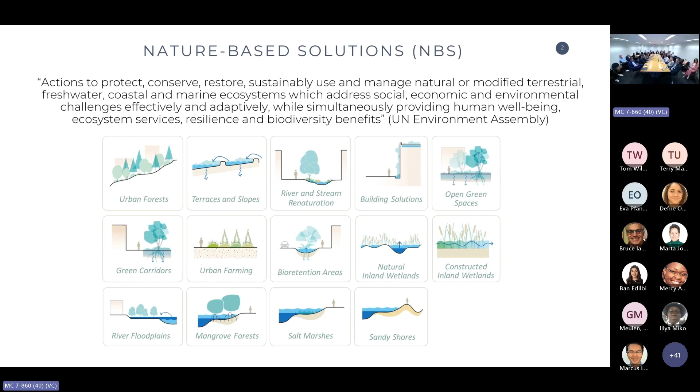And we did that through 3 pillars that we're working across. We develop knowledge, where we identify knowledge gaps on nature-based solutions. We provide operational support with the integration of NBS in actual World Bank projects, and we foster partnerships, working with partners like the International Working Group here today to stay updated on the latest developments around nature-based solutions.

Despite the growing demand for nature-based solutions, there are still several challenges that prevent NBS from being implemented. One challenge we come across often is around operations and maintenance of nature-based solutions. This is seen as a significant knowledge gap when we talk to World Bank teams or governments around the world. Even when client governments understand the potential of NBS and investment options, they can still hesitate to implement them when uncertain about their O&M.

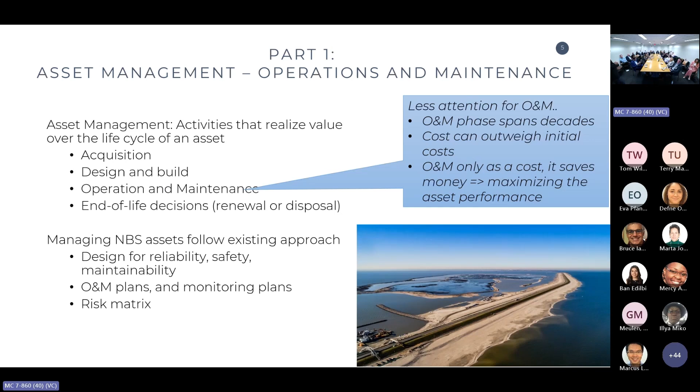What's the difference when you think about an NBS asset? In general, you can say that the behavior of the asset is unclear in the beginning. Maybe you don't know yet how it will develop.

So you need a strong monitoring program in the beginning, in the initial stage. I was part of many monitoring programs, and I thought it's also a very great opportunity for students. This is a picture from a while ago when we had a student at this Sand Nourishment, so it's a great opportunity to learn for students.

Another difference with NBS assets is that they have less sharply defined boundaries. It's nature, it can be bigger, it can be small. It's not only a levee, but maybe also the foreshore, so it can be much bigger.

And secondly, NBS assets can change over time because we deal with soft material, but also nature can change. It can grow, it can decay. So there are more changes we have to take into account when we think about asset management.

In general, you can say that NBS assets are maybe more complex and there are more stakeholders involved. And in these guidelines, we want to help how to deal with these differences.

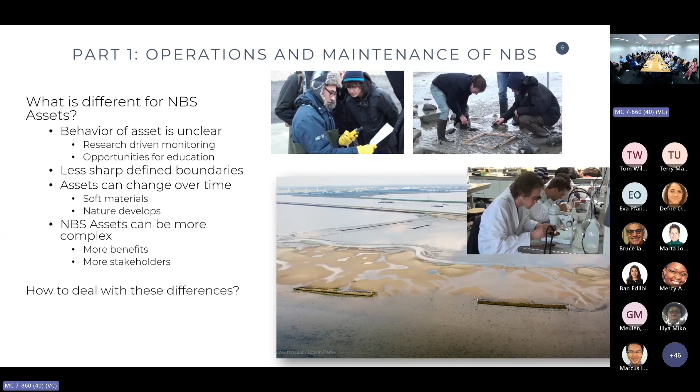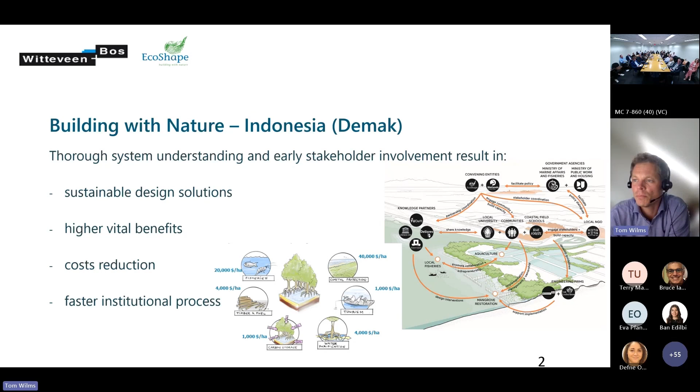A bit about the project. The vision we had at the start, and which we were able to achieve as far as possible, was a cyclic or iterative vision, because you need a prosperous local economy to enable the maintenance of the mangrove green belt. But you also need the mangrove green belt to provide coastal safety for the enabling economy to prosper. So it's not only protection or only production, they go hand in hand, and that is what we did in the project.

But I will focus mostly on the mangrove greenbelt and even on the temporary permeable structures. So where is the project? It is in Indonesia, on the island of Java, and the area shows the coastal area of interest.

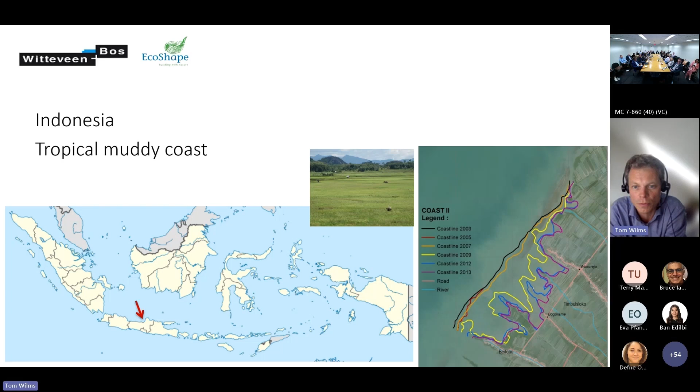It used to be paddy fields, rice fields, which were later converted to aquaculture ponds, and on the right image you see the coastal retreat. So in roughly 10 years, the coastline retreated at some locations up to 2 to 3 kilometers. So some villages were lost, and people needed to be relocated, as you see in the images here.

On the top, you see houses flooded and within the mud. So those people had to be removed.

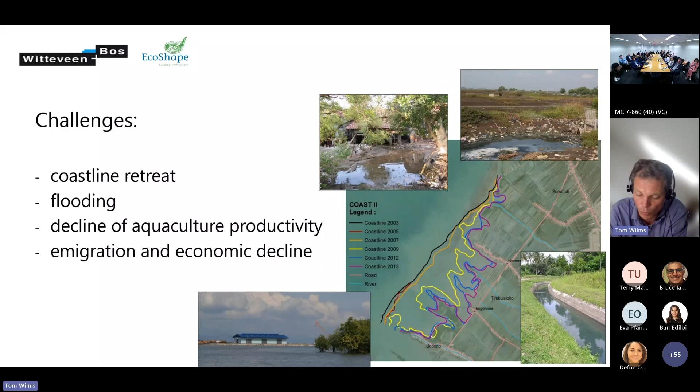We first did a thorough system understanding and continued with that over the entire project, but also looked for alternatives for coastal protection. We learned that both hard structures as well as mangrove planting often don't work in muddy systems or in coastal systems.

But we also looked at successful alternatives which were used in the Wadden Sea in the Netherlands: permeable structures that trap sediment, and over time the area heightens. That is what you see at the right. Also there, it was learning by doing.

We improve the structures every year. We build new structures every year, but every year we also learn from the structures we built. The structure at the right was built, I think, always before stormy season, and after 2 months, the sediment at the right side was even already above low water level or mean sea level.

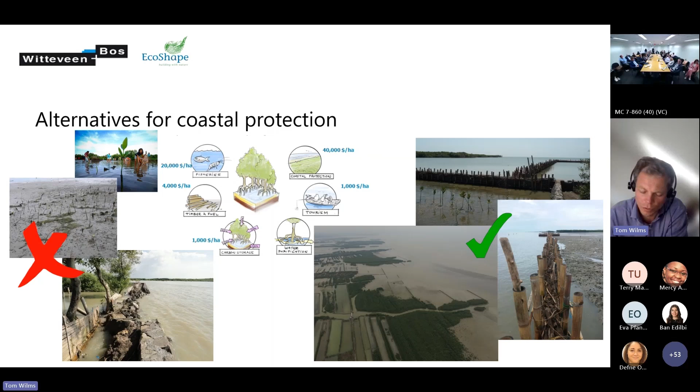In the middle image, you also see the permeable structures as well. Behind them, sedimentation takes place, and also mangrove patches come back. So the focus for the remaining minutes will be on the monitoring and maintenance of those permeable structures.

The monitoring was done on various spatial levels. We have, for example, a monitoring pole to monitor sedimentation rates before, behind and in front of the permeable structures. We also monitored the structures themselves, as well as the elements of the structures: the vertical poles, the horizontal beams, the fill material, and the wire used to keep it strong.

Everything we did was together with the field team and local people, deciding where to build new structures. We did tests on how to build it, involving new contractors since this was a new structure they hadn't built before. Both contractors and the team joined the training to see how it works.

These were also, for me, the very first poles that were placed into the mud. That was done all manually, by jumping on a horizontal beam, poles were pushed into the soil.

Local communities were involved from the very first start, not only for construction, but also inspection of the materials. So all the materials that arrived needed to be checked.

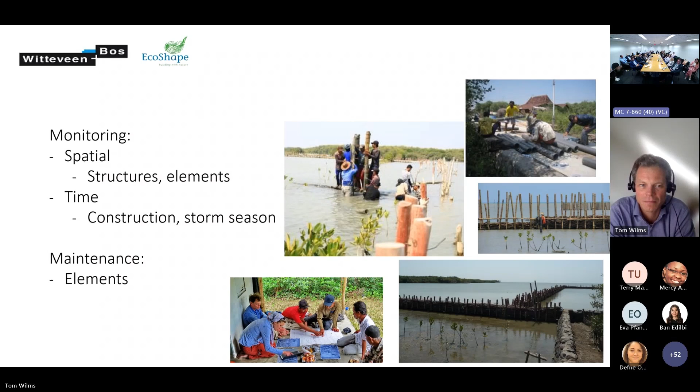Then I will speed up. Challenges were that there was shipworm, so the poles were eaten. So we moved to bamboo, but we also had other learnings, and we also moved to PVC poles in the end.

Financing part: this project was funded by the Dutch government and German government. We made some papers also about cost, showing construction cost and maintenance cost. Maintenance cost per year was roughly half of construction cost.

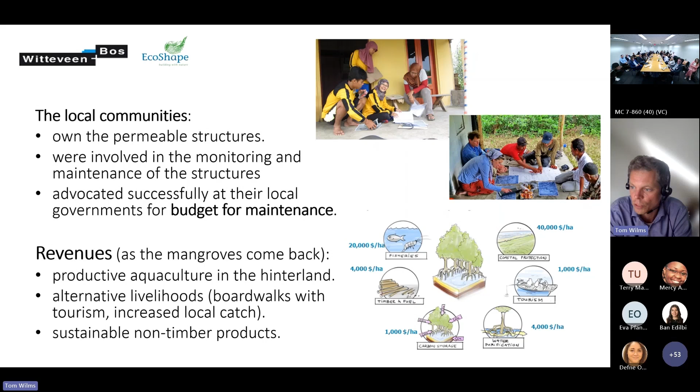As I said, the local community did a lot. They owned the structures, were involved in every phase, and they also advocated and lobbied for financing from local governments, which they received. Because the permeable structures bring back mangroves, there are a lot of revenues, which was part of the vision as well - aquaculture provides revenues, tourism, and also products from the forest.

All right, I'm going to assume I haven't heard anything bad, that you can all see this. Thank you so much, and welcome to the Hamilton Wetlands Restoration Project. The project's located about 30 minutes north of San Francisco in California, here in the United States. It's a two-part project: wetland creation at a former Army base and the beneficial reuse of dredged material. The project is composed of 3 different sites, and once completed, it'll restore about 2,000 acres.

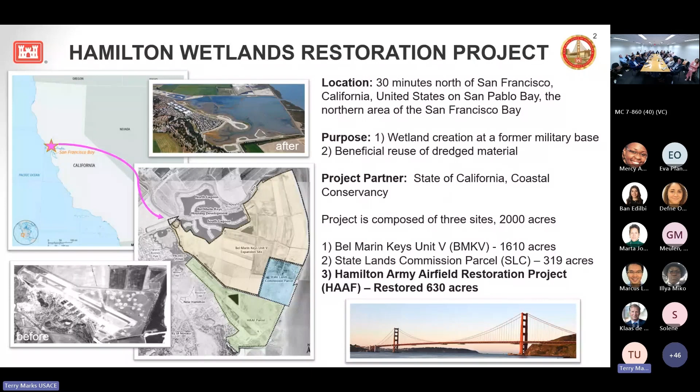But I'm just going to focus on the Hamilton Army Airfield project here. The project is located, like I mentioned, here in the San Francisco Bay. And why did we have to do this? Well, since 1850, the San Francisco Bay has lost about 90% of the Bay wetlands. On the map here, you can see the smiley face is San Francisco, and the pink star is our project location up in the North Bay on San Pablo Bay.

And so what happened in 1849 is that they found gold in California, and there was the big gold rush, and population increased dramatically. Population here in California has done nothing but increase dramatically since then. And in the San Francisco Bay, people moved, and everyone started reusing the bay and repurposing it for other uses: military, agriculture, salt production, even landfills.

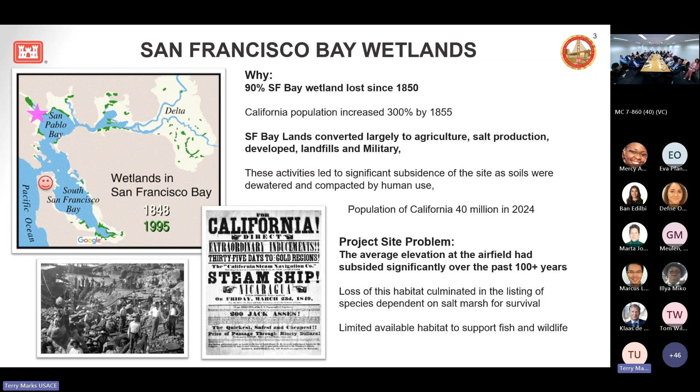So you can see the yellow on the map is where the wetlands used to be, and the green shows where they were in 1995. And what happens when you separate the wetlands from the bay, the bay mud subsides, it shrinks.

And so then the San Francisco district also has a mission to dredge the San Francisco Bay and keep it open for commerce. That's one part of the project. And then the other part is we have all these wetlands that have subsided below the levels that are useful. So then what we did is we married the two, and we have the beneficial reuse of dredged material. That was one of the key components of this project, reusing the dredged material to provide the sediment necessary for the project to create the wetland.

Okay, so in 2014, the site was breached and construction was complete. Real quick, for construction, these deep dredgers go out and dredge the channels in the bay, and then they need to bring it to the site. But the problem is that the San Francisco Bay, particularly in the North Bay, is notoriously shallow, so they couldn't get the dredgers in close enough to offload the material.

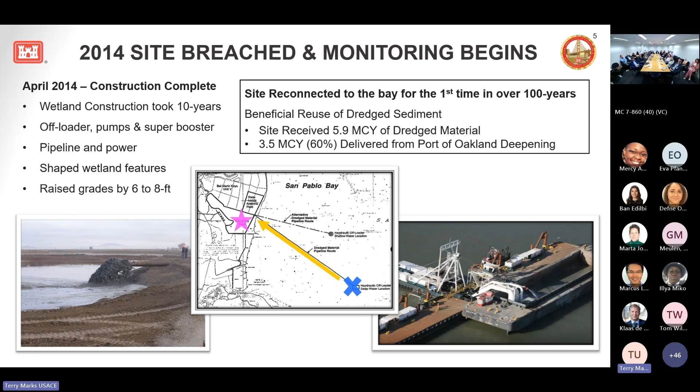So where the blue X is on the map, they had to bring out or create an offloader. The dredgers would come to the offloaders, then offload the material, and then they had to pump the material 5 miles to the site. Once they get the material to the site, then they can raise the grades, and this is going to help Mother Nature create a wetland much faster than if we just opened the site to the bay. And then from there, we started to shape the wetland features.

So what are the features? What did we create?

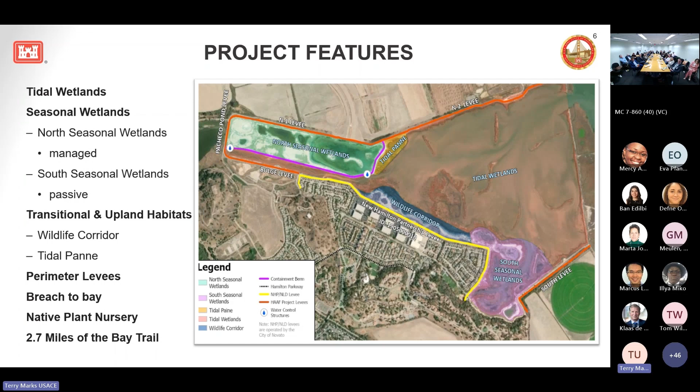We created tidal wetlands, seasonal wetlands, transitional upland habitats, and perimeter levees that contain the site and the sediment and the tidal bay. We breached the site to the bay. We created a native plant nursery, and we also added a recreation component: 3 miles of the San Francisco Bay Trail, which will eventually encompass the entire bay and span 500 miles.

So then we breached the bay. What happens next? That's where our monitoring and adaptive management comes into play. We had many different people and resource agencies, regulators, and long-term stakeholders who wanted and had their own opinions about what the project should be and what it should look like. So we got them all together and put together a plan: a 15-year plan for monitoring and adaptive management.

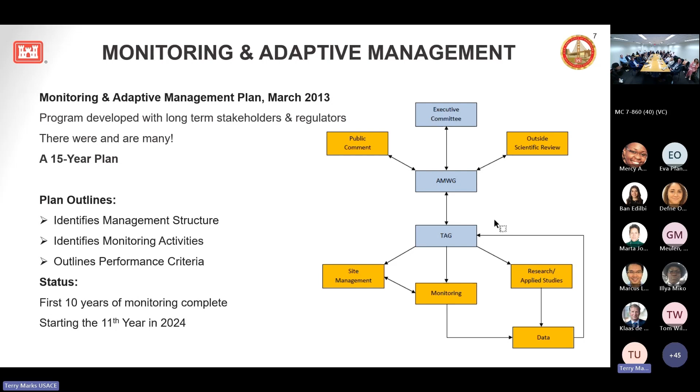The plan outlines the management structure, the monitoring activities, and our performance criteria. Right now we are just starting our 11th year of monitoring. So what happens when we do all this monitoring? We do it annually, and we put together a report—an annual monitoring report.

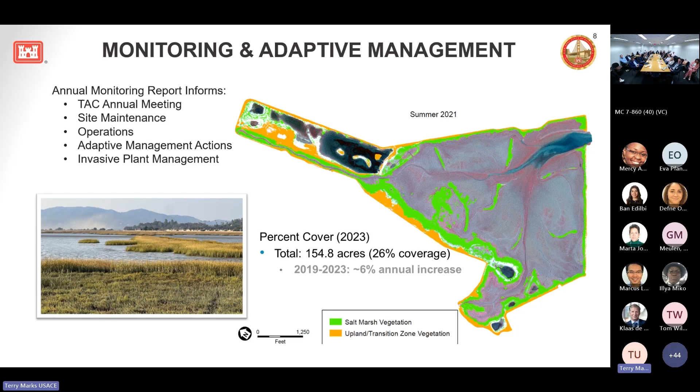This report is provided to all the regulators, whoever wants to see it, but we also have what we call a technical advisory committee. This committee gets together every year and we review the report, determine where the project's going, how it's performing, what's underperforming, what's doing great, and we plan to move from there.

So what were our targeted benefits here? Essentially to create 80% tidal wetlands, 20% seasonal wetlands, ensure no net loss of wetland habitat, and sustain our wildlife populations. One key factor I want to emphasize is an additional consideration that is very important: preventing invasive plants. We have a very large problem with invasive plants.

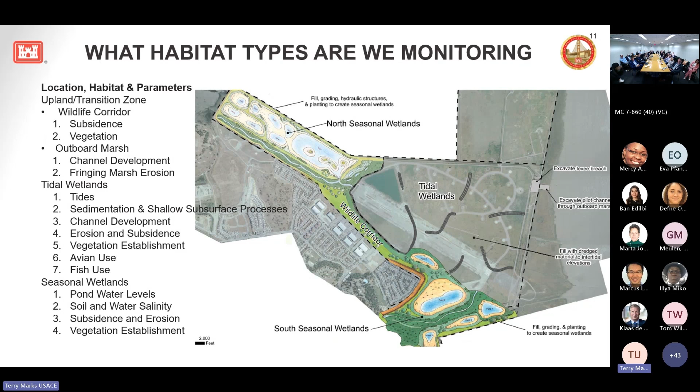Another part of the plan is the performance criteria and the monitoring metrics. We have 4 distinct categories, further defined by the habitat type of each project feature. So what are we monitoring? These are our habitat types, our locations, and our parameters, monitored in various different forms each year.

Our challenges, successes, and lessons learned—we have many, and this is not an exhaustive list. We are working on a final lessons learned report, but one thing I want to note is that this project benefits from a significant investment in monitoring and adaptive management. And it's very true, but it's not just monetary—the community and the regulators also have a large investment in the project.

One success story that I particularly wanted to point out, which takes into account monitoring, adaptive management, and lessons learned, is the Western Snowy Plover. This is a listed species that the project team did not plan for being at the site—it's not favorable conditions for them there.

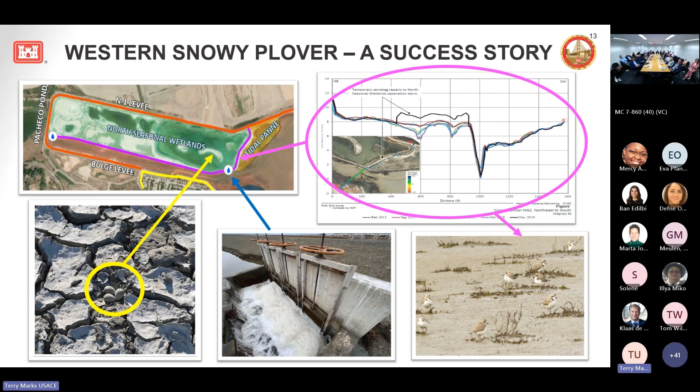So we adapted and started operating for the snowy plovers. We went in, raised the berm, and fixed it, and now we operate for them. It's a really good, nice success story. We have an interim O&M manual. Our project partner, the California Coastal Conservancy, does the maintenance on the project, and we only have minimal actual operations, which are these 2 water control structures in the North Seasonal Wetlands.

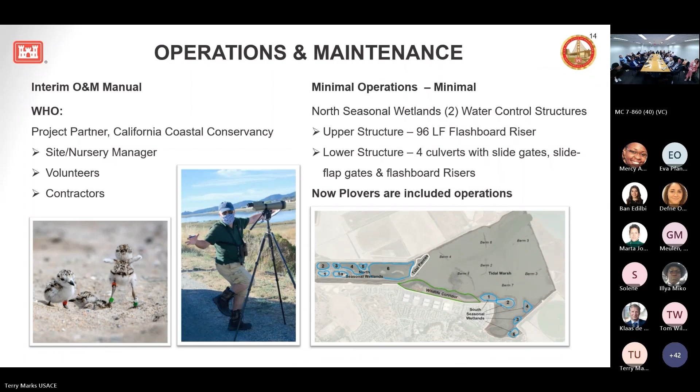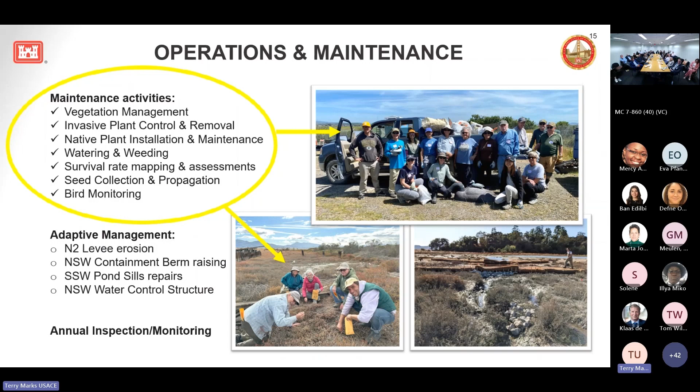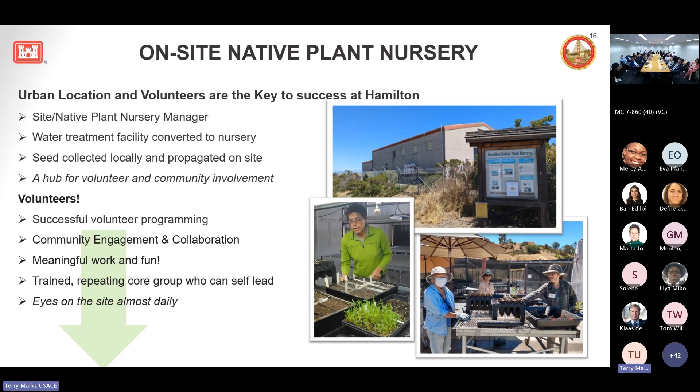Most of our maintenance is actually performed by volunteers, and that's because a huge part of the maintenance of the project is invasive plant removal and native plant installation. That native plant installation and maintenance includes a lot of different components, and it takes a lot of manual labor, and all of our volunteers are there all the time. We have an on-site native plant nursery, and one of the key components to this project, the key to success, is the urban location. We are located in a very urban area. Volunteers live nearby. They can come anytime and help out, and they do, and this has become a very large community for the project, and they help immensely.

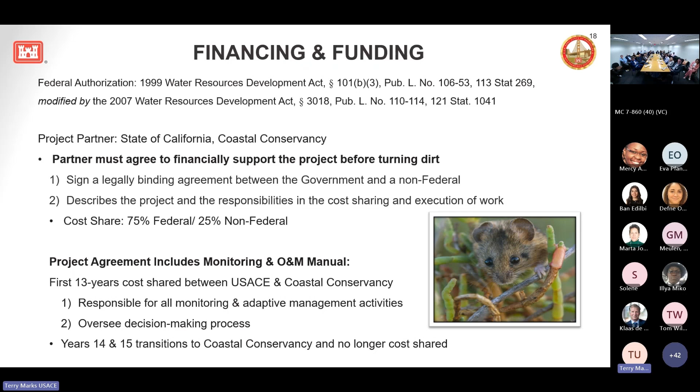Our project partners basically have to agree to financially support the project before we turn dirt, and they sign a legally binding agreement that describes the roles and responsibilities for them to do this work. In our project agreement, it includes the monitoring and O&M, and the first 13 years of monitoring is cost shared between the Corps, the federal government, and our project partner. Years 14 and 15 of the monitoring will transfer to be solely the responsibility of our non-federal sponsor.

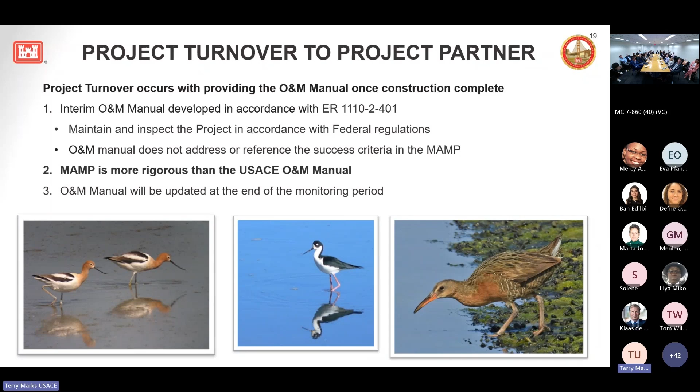Project turnover occurs with providing an O&M manual. Once construction is complete, the O&M manual has been provided to the non-federal sponsor, and then we're going to update it at the end of the monitoring period to include lessons learned and any adaptive management issues that we need to be addressed, and costs. The total project costs for the monitoring and adaptive management for the 13 years is estimated to be about $12 million, which is about 10% of the total project cost.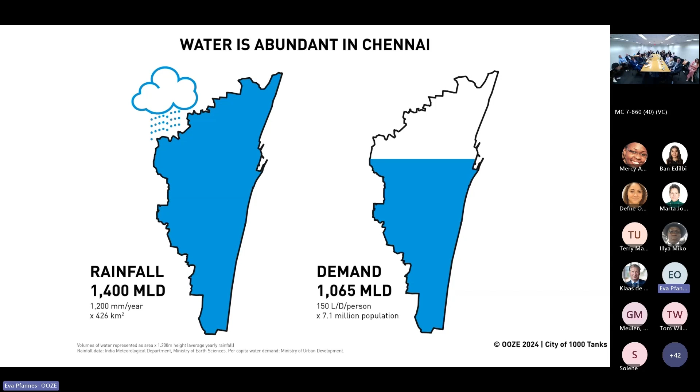We look at context and climate change projections, and one very important one is the interrelation of crisis between too much and too little water. In 2019, Chennai ran out of water — Day Zero, water literally had to come in by train. But when we look at the rainfall, this idea of scarcity is actually not necessary. If we understand, even a city of 7 million needs less than nature provides.

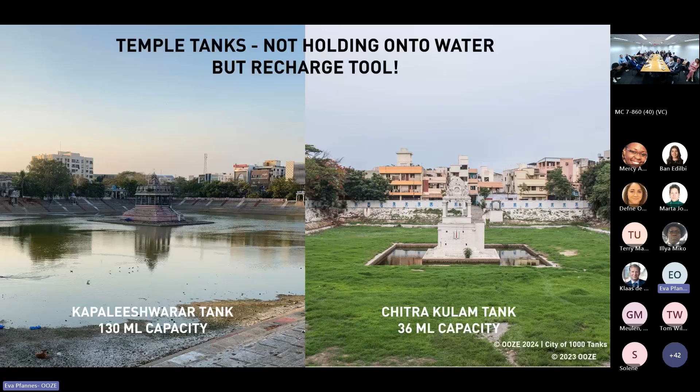Our ancestors have dealt with this by actually constructing temple tanks that are now nearly empty, that are not holding on to water, but function like inverted pyramids, like a recharge tool for the monsoon time. 80% of the soil structure in Chennai is favorable to actually create — eventually the asset here is to create safe water in the ground, that's the asset. We now look at a toolbox of nature-based solutions that extend from the natural areas, forest retention and natural wetlands, towards the whole city.

So they look at how roofs, streets, and squares can not only collect rainwater, but how we can actually make water available 24/7 and tap into the resource of wastewater. So that's also what our pilot looks like, combining these approaches—going from a situation of scarcity to abundance by changing business as usual to a water balance model. Now, how does it do that?

It looks at far away resources that are consumed, mostly untreated, flowing into the sea, diminishing and polluting the aquifer, and leading to this water scarce situation. By introducing nature-based solutions to collect, recharge, treat, and recycle water, we can reduce consumption and create a safe water situation.

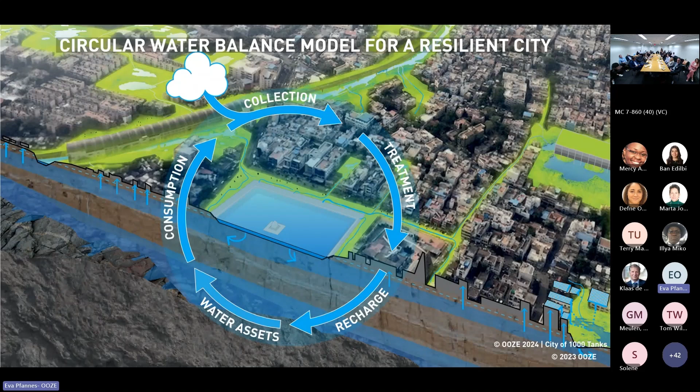So the idea is that the city and the citizens themselves can provide their own city with a service that creates a safe water situation. We proved this with a demonstration model constructed between 2021 and 2023 in a school for the blind and deaf. We're looking at a site of around 4 hectares, with around 700 children living and going to school here. We have a site which has the same urgency as the city itself.

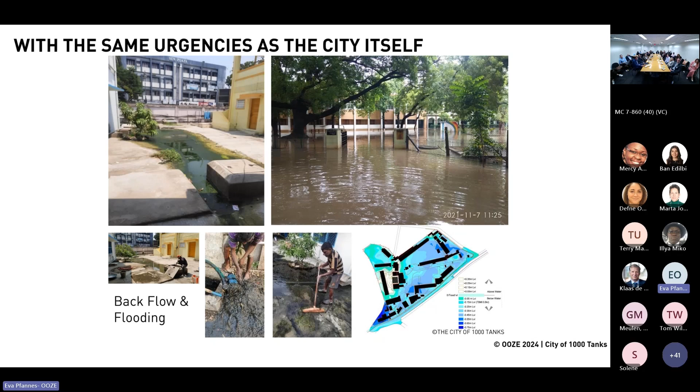That is flooding during the monsoons, but also backflow—meaning the sewer actually overflows and creates a very unhygienic situation. The topography in Chennai is very flat, so the standard gravity system often does not work and leads to situations like this.

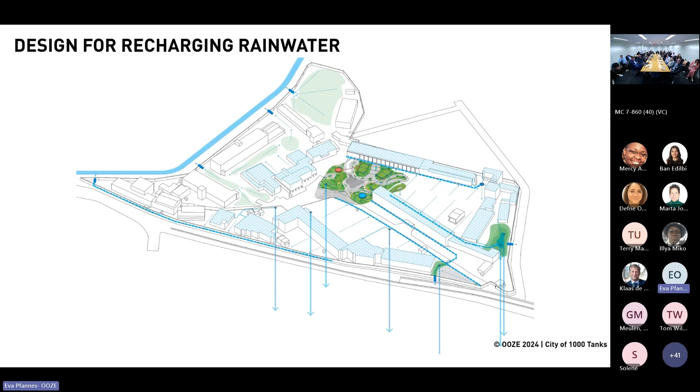So we're looking at a design for recharging rainwater with recharge wells across the campus. The more innovative aspect here is a design for treating and recharging the treated wastewater. This is a site of around 2,300 square meters in the center of the campus, where we constructed a settler, an anaerobic reactor or septic tank—that's the stage 1 treatment.

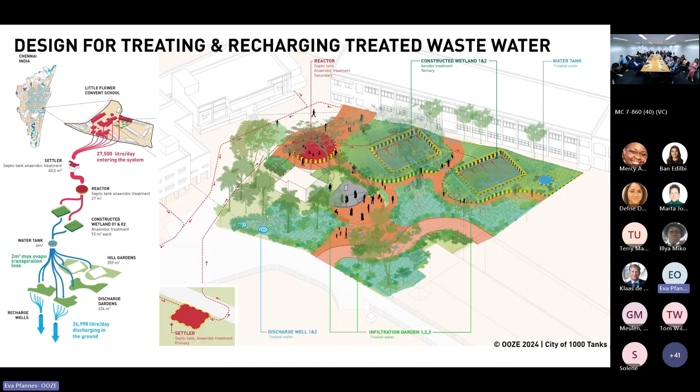Then we have 2 subsurface flow constructed wetlands, a water tank, an infiltration field of around 700 square meters, and eventually some discharge wells to discharge the remaining water into the aquifer.

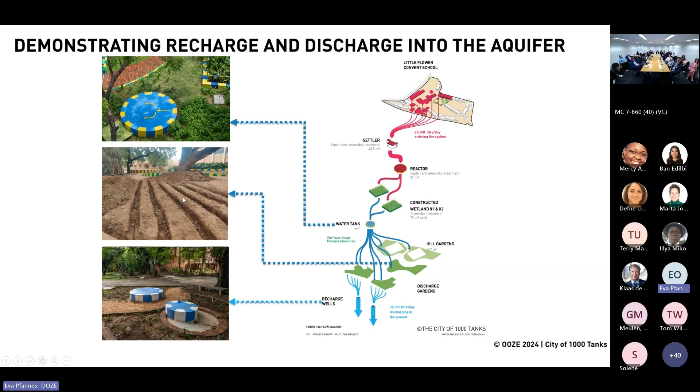So we see here how the pilot is set up as a demonstration model, where everybody who visits—which is very important for capacity building—can understand all the different elements, almost like reading a diagram. You see here the flow model next to what we've actually implemented. Now those grooves in the ground you can't see anymore, because that's where the discharge pipes with small holes are—that's where the treated wastewater is discharged, functioning like an irrigation system for the park we see here.

So the built environment itself is the communicator for new generations to understand that change is possible. The pilot becomes, within the city, a campaigner for improved biodiversity. This is after 1 year, as we can see in these pictures. The amazing thing is we see an STP, a sewage treatment plant, inserted in the heart of the campus—so we're also trying to remove the stigma of sewage treatment.

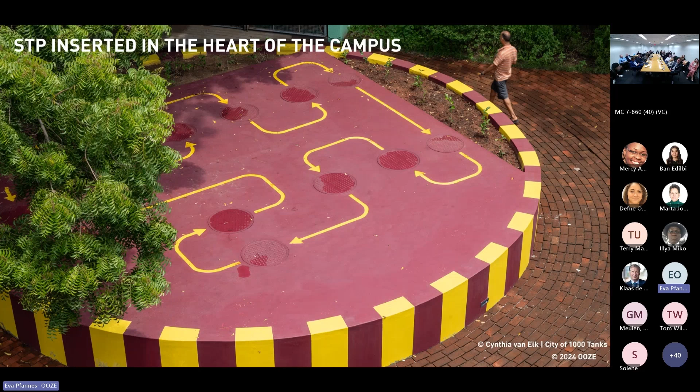Now, what are the primary benefits of this pilot? A model of decentralized wastewater treatment and aquifer recharge was built and can prove safe performance. And we close the cycle with a recharge of rainwater that also leads to flood mitigation.

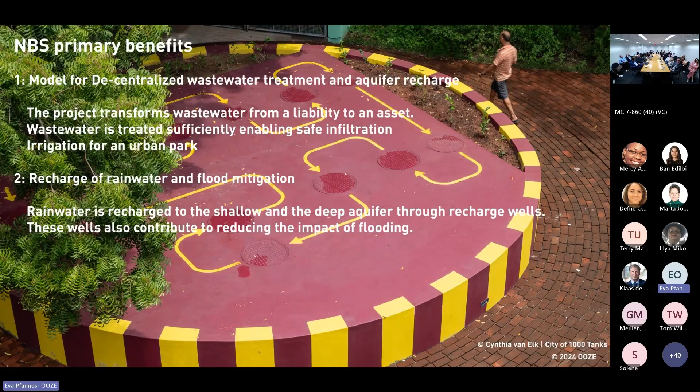Then there are a number of secondary benefits for this pilot. We can use it for citywide awareness building with events, capacity training, and media. We monitor the flora and fauna annually. We can prove a cooling impact on the microclimate. We have increased carbon sequestration, not only from the green cover, but because all pumps are supported through photovoltaic solar electricity, resulting in a net zero carbon energy footprint for the sewage treatment and rainwater collection. And we demonstrate a closed water loop connecting several nature-based solutions within one location.

According to our local team, this is really the first time everything is integrated in a closed loop. We now have a maintenance plan—a 3-year maintenance period subsidized by the Dutch government, after which we're looking for local financing. That means in this case we have a gardener and 2 specialized staff for normal maintenance: removal of dried leaves, multiplication of plants, de-weeding, cleaning the grease trap, and washing the disc filter.

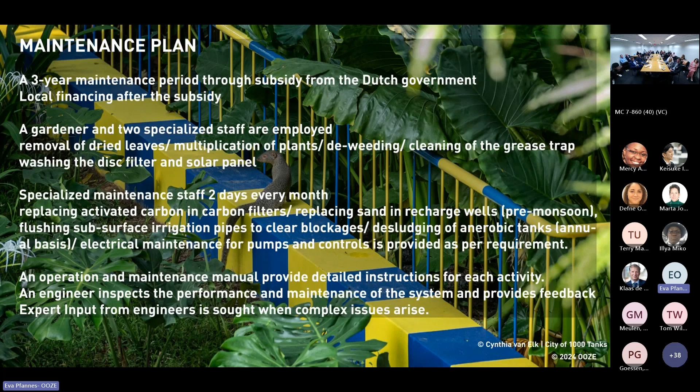Replacing activated carbon in the carbon filters, replacing the sand in the recharge wells, and on an annual basis desludging the anaerobic tanks, plus electrical maintenance for the pumps and controls—which right now is where most of our attention goes, to the electrical system. We also have an operation and maintenance manual to provide detailed instructions, because the performance of this piece is really all what it's about, so we can prove that within the city we can reach the same performance as with STPs outside the cities.

So we have here water chemistry samples that are gathered every 4 months that include parameters such as pH, chemical oxygen demand, biochemical oxygen demand, suspended solids, etc. So we are all within the standards.

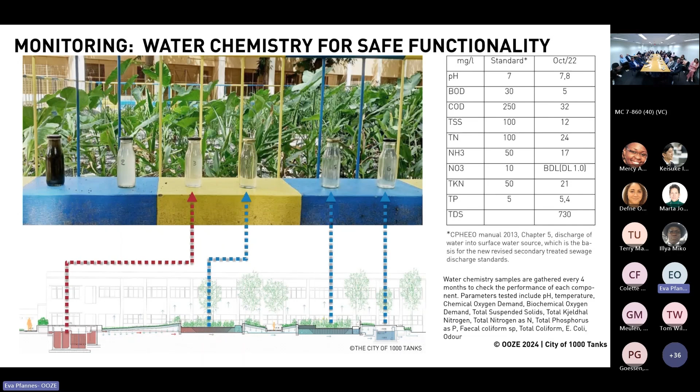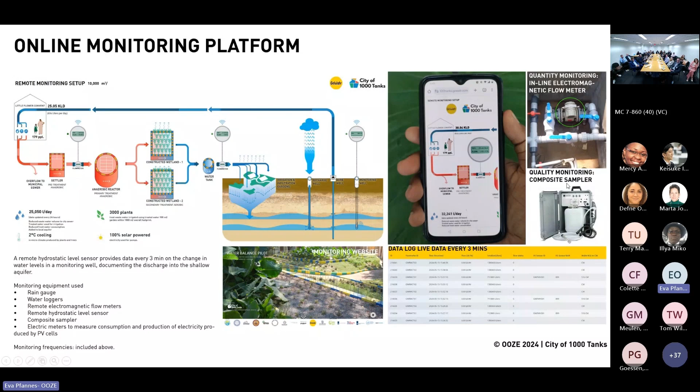We have created an online monitoring platform that connects all the elements of the closed loop. So that's a quantity monitoring we see here, a flow meter, and quality is basically measured by hand every 4 months with a composite sampler.

Keeping the flow in check is very important, because we see an interesting fact: while the campus is fully occupied, as we irrigate the plants, and the constructed wetlands need continuous flows, we actually have a better level in the aquifer. So it's higher when the campus is fully occupied, and when the campus goes into vacation period, the level in the aquifer, which is minus 4.5 meters, is actually sinking. So through that, we can see it does work.

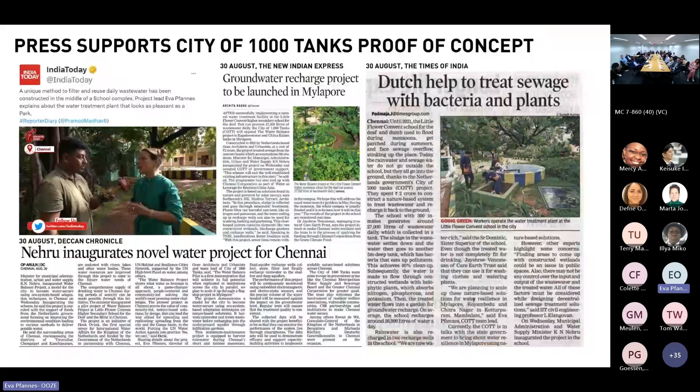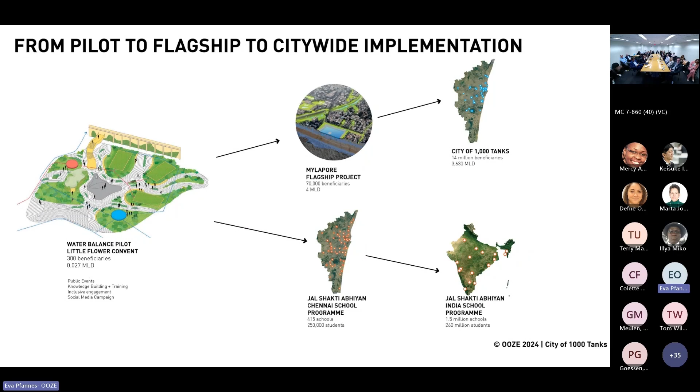We used the pilot also for political outreach. That was the opening. We have very positive response from the press, so the pilot, even though it's very tiny, is functioning within the city to create knowledge locally and internationally, and eventually also as a proof of concept for the upscaling of nature-based solutions within the city of Chennai. That is so important.

That is part of our initial plan to upscale. This was the initial water as leverage trajectory, the pre-feasibility. Now we've done the field trials, and we're looking at a new upscaling of the project, City of 1,000 Tanks. Thank you so much for listening.

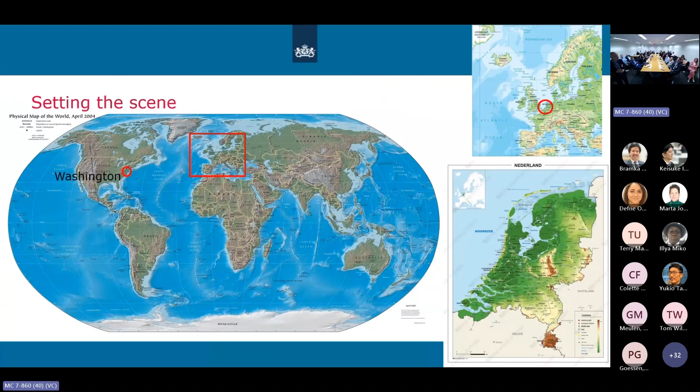So we are going to Europe this time, and we are going to the Netherlands. So setting the scene, Washington over there in the West, Square Europe, and then focusing on the Netherlands -- a very low-lying country. Highest point is about 300 meters, so I think we are in the top 5 of countries with the lowest highest point. Think about it, and see this website.

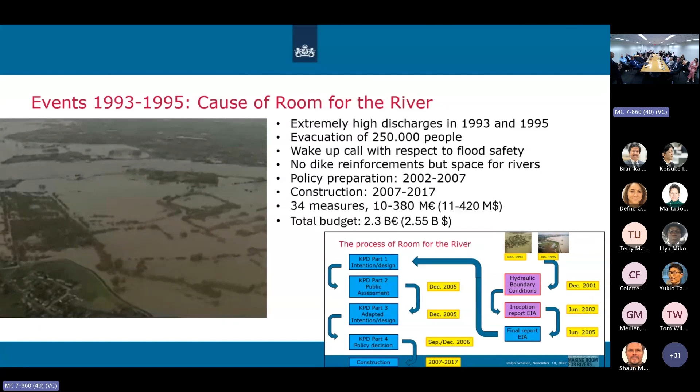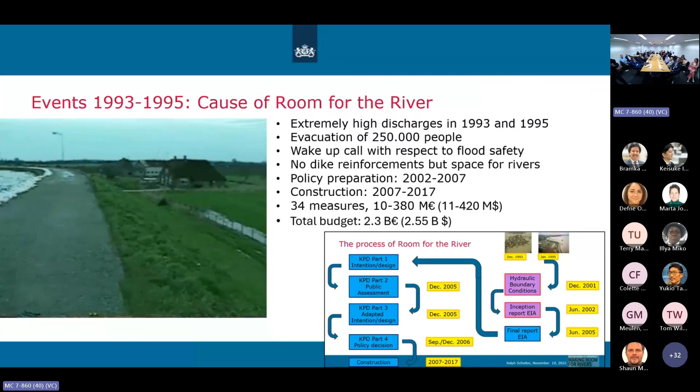So in that country, in 1993 and 1995, some things happened. We experienced very high discharge in our main river system. You see the video playing -- the water is between the embankments, near and very near to the crest of the dikes. You see the low-lying land beside the dikes. We had to apply sandbags in order to prevent flooding. For a country like the Netherlands, which was very proud of its water management, this was really an enormous wake-up call. We had to evacuate over 250,000 people. After those events, we thought: okay, we have to do something in order to keep our safety standards.

In the lower right picture, you see the process. I'm not going to talk about that, that will take me more than an hour, although it is a very interesting process. What I want to focus about is actually that.

So after the events of 1995, we did many calculations to show how big the problem was. In the period from 2002 to 2007, we did the policy preparations and the actual construction of 34 different measures, which I'll show in a minute. Construction took place between 2007 and 2017, within a period of 10 years. Total budget was about 2.3 billion euros, and the various measures ranged between 10 and 380 million euros, with amounts in dollars in the brackets.

Okay, so what's Room for the River? It's a coherent set of measures, and that coherent aspect is quite important. We could not just choose sub-measures. We did a system analysis, and then we placed all the different measures that were needed in order to lower the floodwater levels and get back to our safety standards. That resulted in these 34 projects distributed over the river branches as a whole.

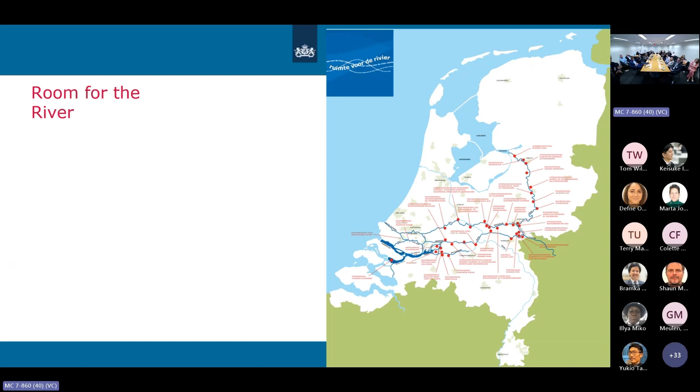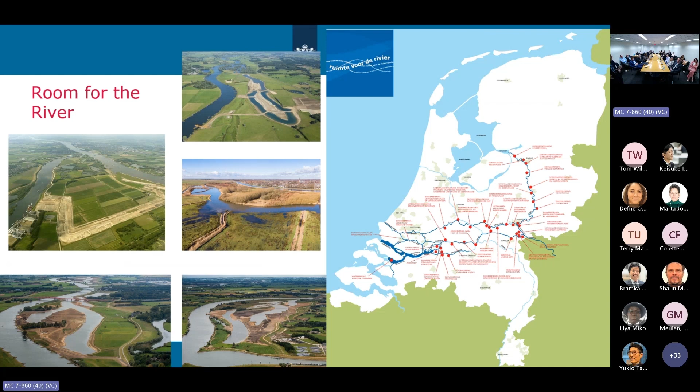And it looks something like this. So we lowered floodplains, we created side channels, we removed obstacles. Sometimes we relocated the dike, so we increased the floodplain itself.

The important and key thing for this presentation is to acknowledge that Room for the River is a demonstration of nature-based solutions, because the program leads to reduction of flood risk by reducing floodwater levels, but simultaneously we increase economic activities, we increase biodiversity, which scientific research also shows through enhanced flora and fauna. We basically added to the general well-being, and that is within this definition of nature-based solutions. So we are solving for one problem, and then we are looking at many co-benefits that these measures have.

Just to show one key example, a large flood side channel near the city of Nijmegen in the eastern part of the Netherlands, at low discharge, where you see the side channel and the opportunities it brings. And here you see it with high discharge.

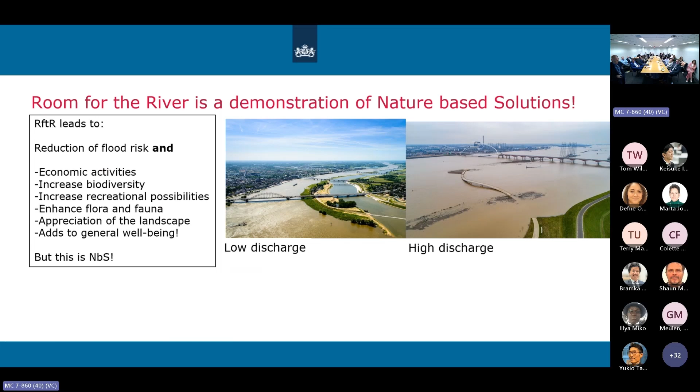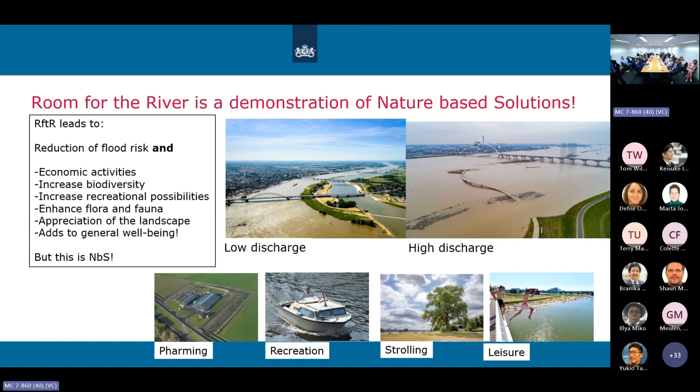Okay, so again, lots of co-benefits for pharming, for recreation, strolling and wandering in the floodplains. Also leisure, although this is not really permitted, I should say, so this is perhaps not a photo that you should use. But people do this, and well, they have a lot of fun in these newly created places.

Now, so what about the maintenance of the Room for the River projects? Room for the River came about due to these high discharges, so we had the policy process, we defined the measures, and they were constructed. Construction is really the key thing of this project. It was a construction project completed within budget and time limitations, which was also quite exceptional at that moment in time.

And at the end of every individual project, we were looking at these kind of circumstances. So we added some space to the floodplain, we created these side channels, and eventually we left that in a kind of bare situation. Knowing that after some time, of course, the vegetation would grow, and then we would get to the end stage that was designed with this various vegetation that we planned.

But we also knew in advance that after some more time, the vegetation would just continue to grow, and perhaps also some willows would start to exist and grow over there, and it would become bigger and bigger, and the floodplain would get rougher and rougher, and then we might perhaps lose this element of the flood reduction.

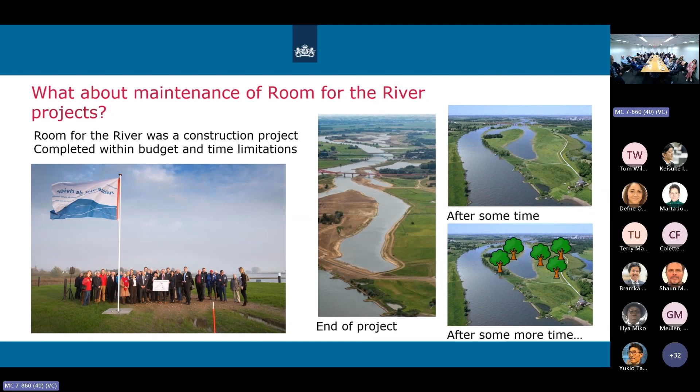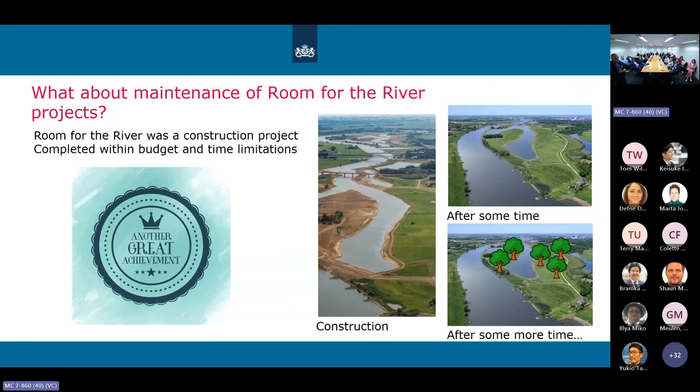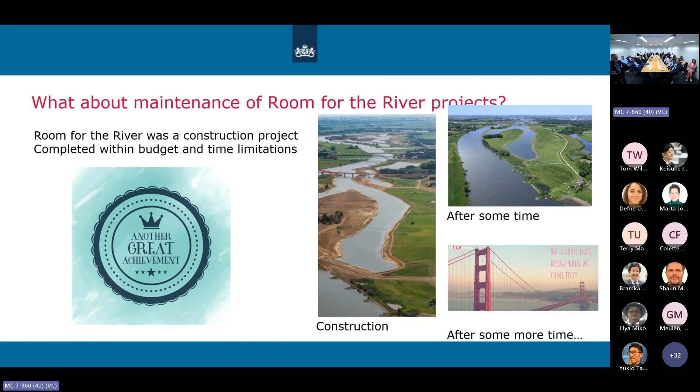So, but again, this was a construction process. At the end of the project, well, we got applauded, and everyone said, okay, this is a great achievement. When we looked at the maintenance, okay, well, let's cross that bridge when we get there. And of course that took a few years, because in the initial stage, well, there was not so much to maintain. But now, actually, we have reached that bridge.

So we are looking again, for instance, at one of the examples of Room for the River. This is along the River IJssel, which flows to the north. You see the construction of the many side channels, and we also see the vegetation that now grows on there.

So at this moment, in particular in the Netherlands, we are dealing with, let's say, the regular operation and maintenance of all the floodplains that we have. We have the additional operation and maintenance of the newly constructed Room for the River projects. And then we also have the construction, operation and maintenance of water framework directives. The water framework is a European project that tries to improve the water quality, and that also involves many side channels, for instance. So we have a lot to do about that.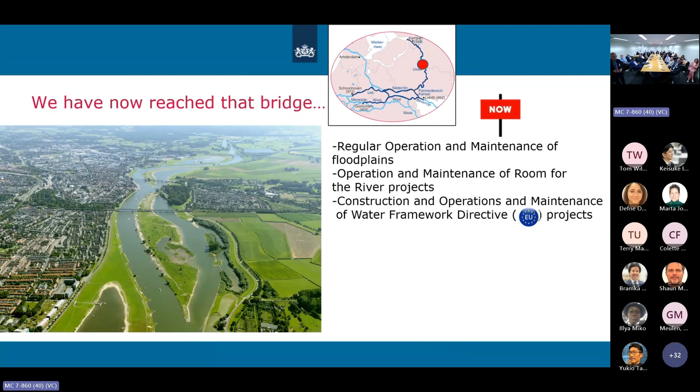And for the future, we are looking at another scheme of measures that we want to implement in order to guarantee also the safety for the longer term, 2050, 2100. So that means additional projects in the floodplains, which need to be maintained.

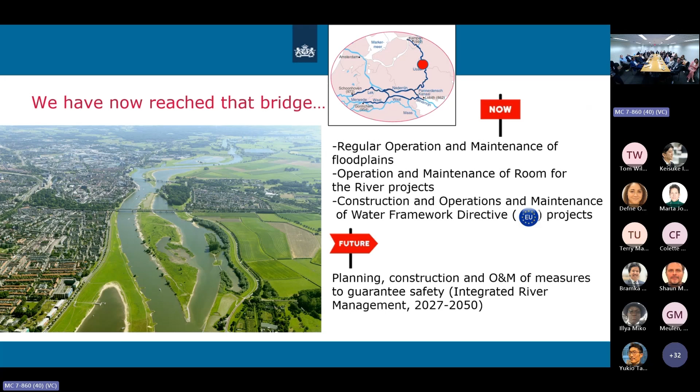So who is responsible for the operation and maintenance in the Netherlands? Well, that is primarily Rijkswaterstaat, which is part of the Ministry of Water Management, and they are responsible for the complete area between the main embankments of all the major river branches. And it doesn't matter whether Rijkswaterstaat is the owner or not.

The maintenance is about the issue of flood management and flood safety. Of course we want to keep a safe situation, but also, as I said, about water quality, and also about a kind of societal functioning, because we allow people to go into the floodplain and do their picnics, do their recreation, and we want them to be safe. But it also means we have to take some actions in order to guarantee that.

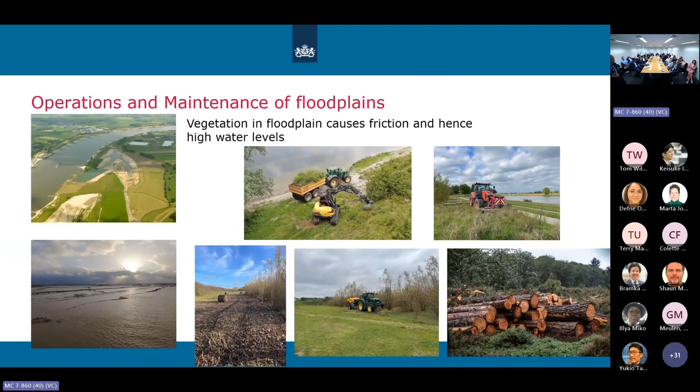So the operation and maintenance itself looks like this. We look at the state of vegetation. Whenever that becomes too high, it causes too much friction, and then we have to interfere. We do that by mowing, sometimes by drastically cutting down trees that have become too big. We ask the farmers to keep their crops low in the winter, such that whenever the floodplain floods, and that's one of the primary functions of the floodplain, the flood water levels are not too high.

Now zooming in on operation and maintenance of side channels, as this is one of the things in the document that was mentioned by Defne and Matthijs. We have approximately 150 kilometers of side channels, and they originate from all the different programs that I just mentioned.

So there's an example. This is actually a combination of 3 individual side channels. And we know also from scientific literature that eventually they all close off. So whenever the floodplain is flooded, that brings sediment, and eventually that fills up these side channels. So that already indicates that all these side channels have to be maintained.

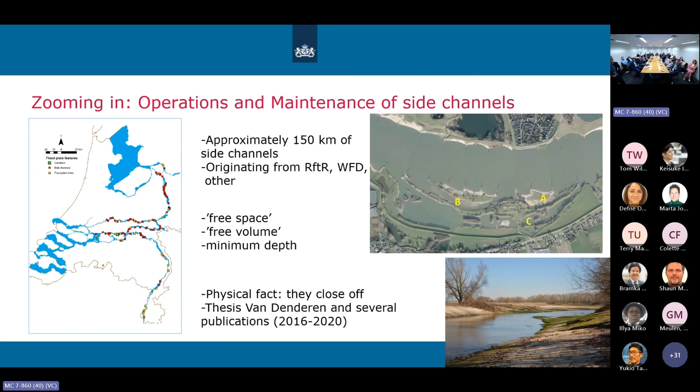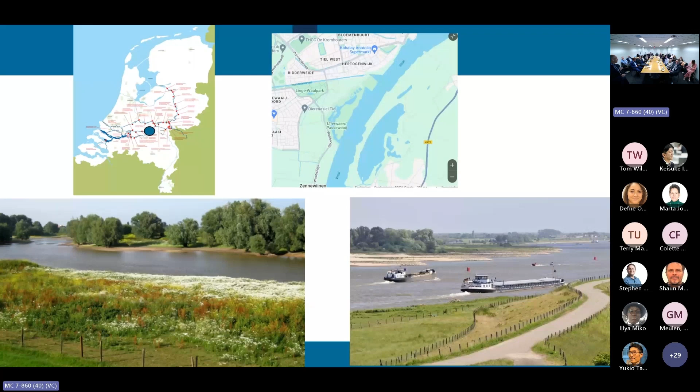As an example, we are looking at one example on the Waal River. It's depicted over here in this inset. Lower left, we see the actual situation of the side channel as it is. Very beautiful place, very biodiverse, I would say. And then if we cross the area inwards to the screen, we come to the main river with all the big shipping activities. Okay, so we have to maintain that.

In order to do that, we define some elements. So we define the element of free space, which is the contour between which the side channel itself may move. We have the free volume, so the threshold for the total volume of the side channel, and also the minimum depth. These are all indicators that we monitor, and whenever they are violated, we have to interfere.

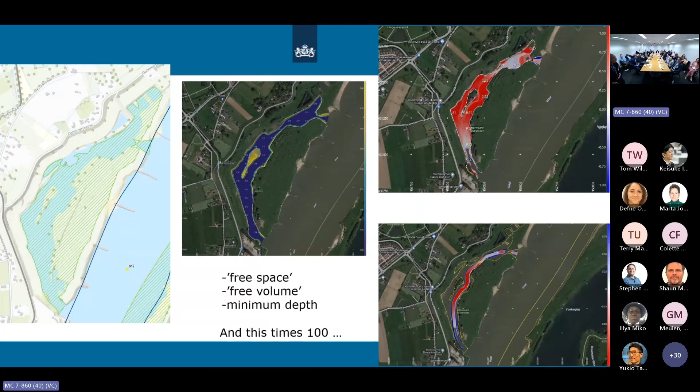And that means, for instance, that we have to dredge the system, or dredge parts of the system. Red means dredging, and blue means that is already deep enough. Just by doing the monitoring, we see what kind of maintenance we need to do. And then we need to do that 100 times because we have so many side channels.

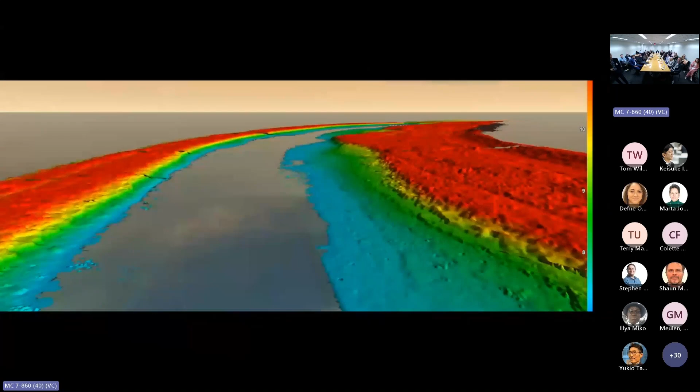Can you click on this movie? Here's an example of how that is done. So this is not construction, but maintenance. We did the monitoring, decided that this side channel was not deep enough anymore based on LiDAR images that we have, and then we decided we have to maintain that, and this is the way that is done.

We also monitor the vegetation in the field just by drones and other ways, and we compare that monitored vegetation to the situation that we wanted to have it in theory. Whenever there is a distinction between that, it's also an indication that we have to interfere.

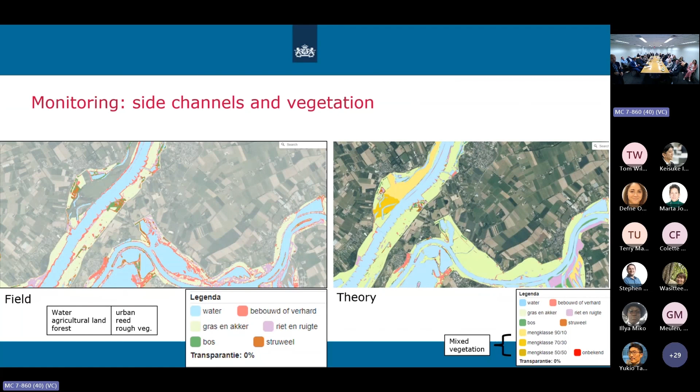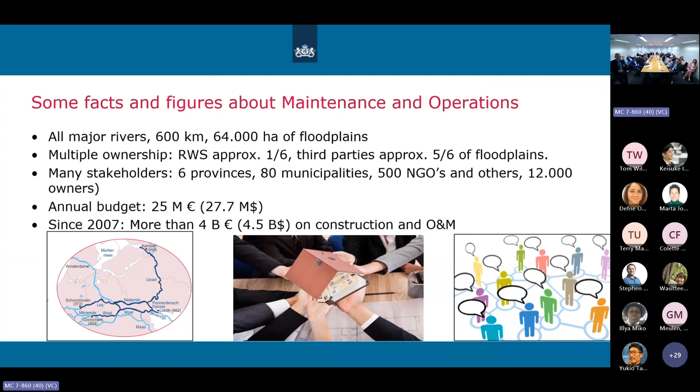So some facts and figures about that. Well, many owners, many municipalities, many stakeholders, and we have about 25 million euros for the annual budget for the maintenance. Now, what about the international outreach?

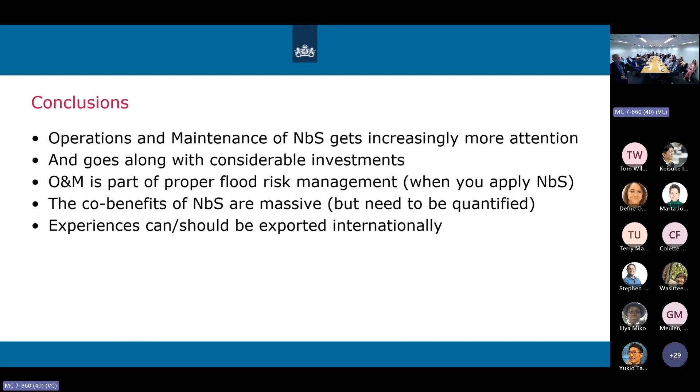We are trying to translate the experience that we have from the Netherlands to other countries like Bangladesh and also Colombia. The main thing we want to transfer is: do not only think about construction, but also think about maintenance. In conclusion, it already gets much attention, but you need to do more. The benefits are massive, but you need to quantify them, and the experiences can or should even be exported internationally.